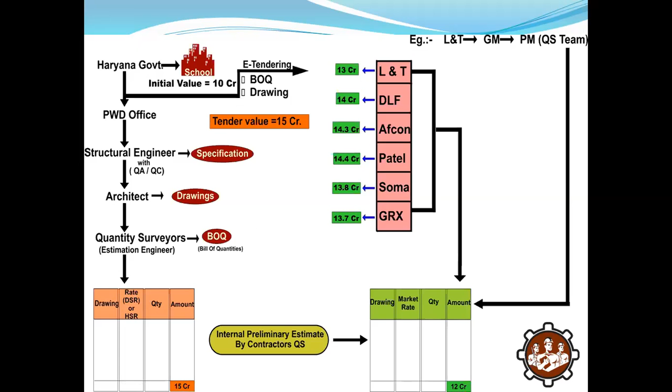Okay, so the contract has been awarded to L&T. Now this 13 crore is called the project value. L&T is ready to execute this whole project at the cost of 13 crore. This is called the project value. Now you will be easily able to identify what is the difference between the tender value and project value.

Contractor quantity surveyors prepare the bill of the works which has been executed. The quantity surveyor will have to also make the bill preparation as well. So here one question comes in my mind: what is the difference between the quantity surveyor and billing engineer? Billing engineer has to handle only the billing part, but the QS has to also make the calculation of the quantities of each and everything.

Okay, so in the whole construction process, you have to remember that whenever we are doing the budgeting, we have to consider the 3M analysis. That is 3M: material, manpower, and machineries. Material is here, and the manpower includes labor estimation, and machinery is the equipment that we are going to use in the construction. Okay, so I hope now it's clear to all of you what is the role of quantity surveyor before the construction.

The whole process that I have explained so far is being done before the construction process. So what is the role of quantity surveyors? He has to make the detailed BOQ before the tendering process if he is working on the client side or government side. And at the time of bidding, if he is working in any company that has shown interest to go for this project, he will do the preliminary estimate as per the current market rate. This whole process is done before the execution of the project or starting of the construction.

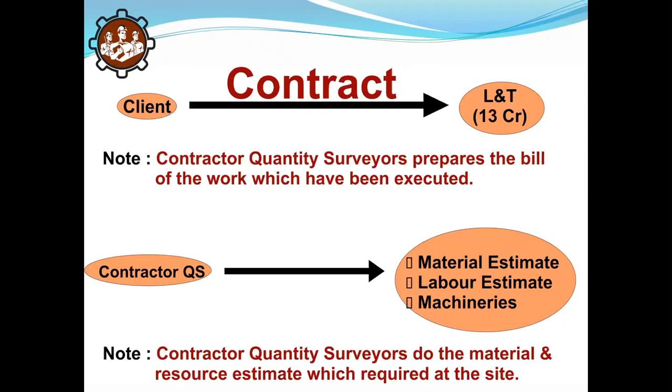What is the role? Let me explain. Suppose this project has been awarded to L&T. The amount of the project value is now 13 crore. Now the quantity surveyors working in L&T will do the analysis of this part, and as per the work order they will make the detailed estimation of the work order, so that once the project has been awarded, they will get the whole details of this project to do the analysis, and make the requirement of material, manpower and machineries accordingly.

Then this data is considered by the planning engineer to plan the project and to do the tracking of the project as well. And after the construction, it will include the valuation, and if there is any sort of discrepancy in the project, that is also being solved by the planning department and managing department.

Okay, this is now clear to you that quantity surveying is a profession in the construction industry where the learned professionals contribute in calculating. What are they calculating? They will give the cost analysis of the project, quantity required for the project, how much sand, cement, aggregate will be needed, and this also includes budgeting, bill of quantities (BOQ), bill preparations and bill certifications. This whole process is calculated by the quantity surveyor, who plays an important role in the budgeting and controlling of any project.

These are the things that are always involved, and a quantity surveyor always has to consider them. So the cost is not only related to material, manpower, machineries. There is also the site preparation cost, construction cost, labor, material, and professional fees, taxes. And one thing I would like to add is that the salary of the professionals involved in the project is also associated with the construction cost of that project.

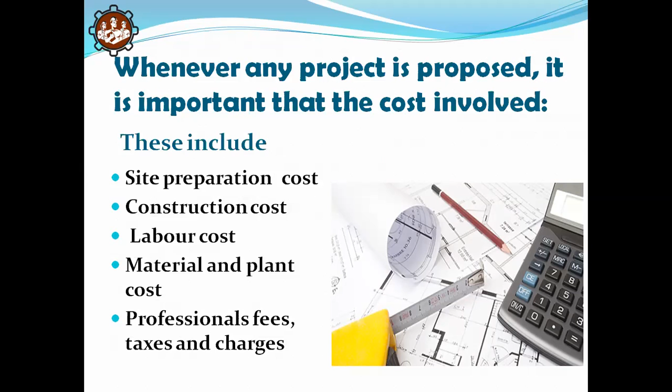Okay, so I hope it's clear till now. Now let's proceed furthermore. Here's the importance of quantity surveying.

The importance of quantity surveying in construction works is one of the most calculated aspects related to quantity, time and cost. Without it, it's hard to survive in the construction industry. The importance of quantity surveying is very vital from the starting of the project till the completion of the project.

So, to understand the importance of a quantity surveyor in the project, suppose a company is going to construct a project. They don't have any idea about the amount of material required for execution. So there might be a loss of money, and a quantity surveyor plays a good role in doing budget controlling to avoid unnecessary materials.

Suppose if we are going to construct a building that will require only 50 to 60 tons of reinforcement, that has to be calculated before the execution of the project. If we are not doing this analysis, we might go for 80 to 100 tons, and the rest becomes wastage, which won't help us do the budget controlling of the project.

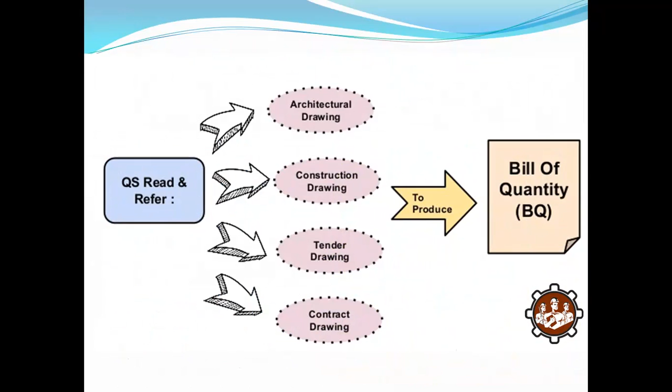Okay, now these are the requirements. If you wish to build your career in this field, you have to be very fluent with these things. You should be able to read every architect drawing, construction drawing, tender drawing and contract drawing. Once you are very fluent with these, then and only then will you be able to make a bill of quantities.

Now, I don't think I need to explain it once again - who can be the QS, where the QS works, what is quantity surveying, and how quantity surveying takes place. I hope all these questions are being answered in this presentation.

Who can be the QS? Someone having professional expertise and proficiency with all kinds of drawings, able to read all types of structural and architectural drawings. A civil engineer can be the quantity surveyor.

Now where does the quantity surveyor play a role? That has already been discussed in the previous slide - before the starting of the project, he plays a role in making the budgeting of that project, giving the company a chance to decide whether they will go for this project or not.

And what is quantity surveying? Quantity surveying has already been explained - it's the budgeting and controlling of any project. How it's being done, I will show you some professional examples in this video, so please bear with me. I hope this video will definitely help you understand the importance of quantity surveying.

If you see the quantity surveying field, there are a lot of vacancies in the current trend in different Gulf countries. There are many vacancies for quantity surveying, but they need a professional who is well trained, who is already aware of all these things, to do the quantity surveying job.

So let's proceed further. This is the scope of quantity surveying. I've mentioned some simple data here to give you a clue. There are some units that we need to consider. This data should be on the fingertips of any quantity surveyor, so he can easily and quickly calculate the quantities.

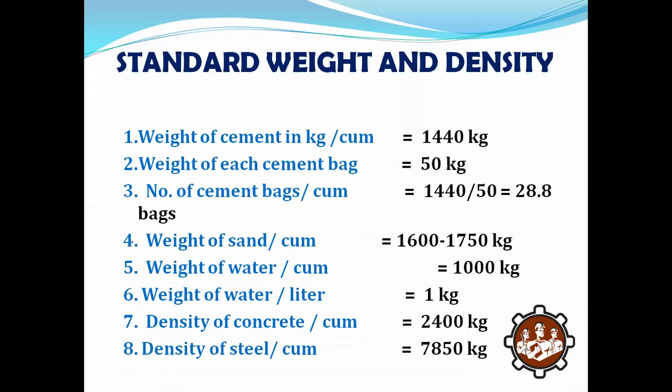With all these skills in place, a quantity surveyor is in a strong position to take a leading managerial role throughout the development of the project and run the construction company. Quantity surveyor is a professional job, you will be working in the office, you do not need to rush to the site all the time. You'll be doing your job in the office, with hardly a few site visits needed. But one thing you need to deal with is the structural and architectural drawings.

So this was all about how to do the quantity surveying part, what is the importance of quantity surveying, and what is the requirement to build your professional career as a quantity surveyor. I hope this is clear to each and every one of you.

Now I will be discussing how you had to read the drawings, from where you can initiate your work to do the quantity surveying job. Just bear with me, please. I'll be sharing a few more structural drawings.

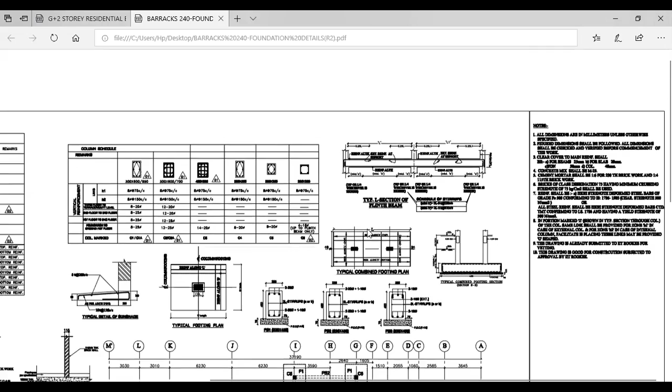This is an important thing for you people. You can see it is a structural drawing of a foundation. There are different aspects, I will not be explaining it in detail, but I'm showing it only to give you an idea about quantity surveying, how a quantity surveyor works, how he deals with the drawings.

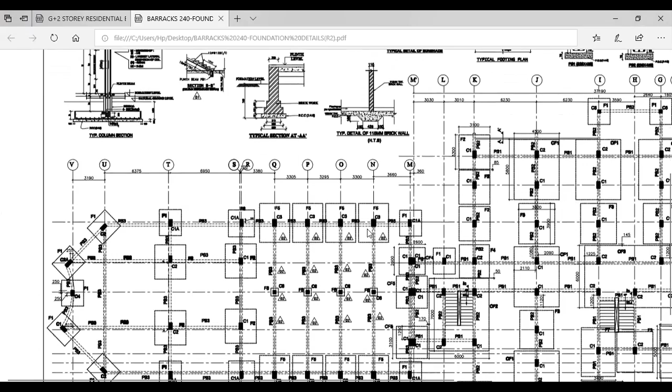Suppose this structure has been built by the structural engineer, and everything has been done so far. Now we are planning to execute this project. We don't know how much cement, sand, aggregate, and labor cost is going to be included in this project. Now it's the job of the quantity surveyor to do that part.

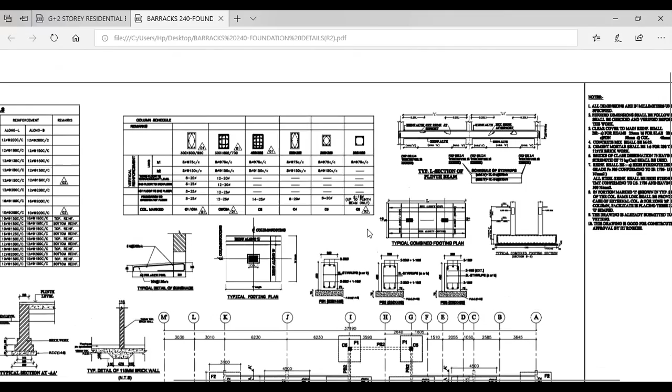The first thing the quantity surveyor will do is the quantity takeoff. First, he will do the quantity takeoff and calculate the number of footings that are going to be constructed in this particular structure. He will be calculating these footings, how many footings are there.

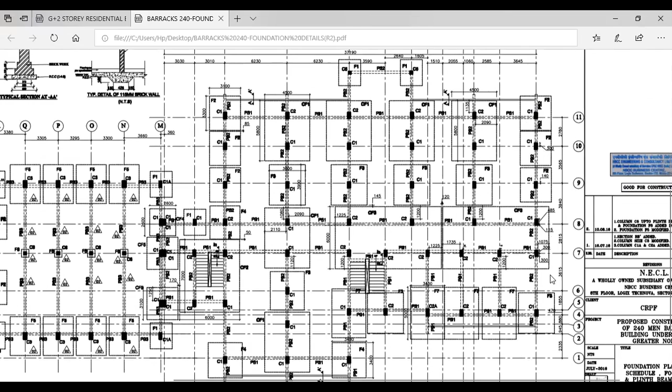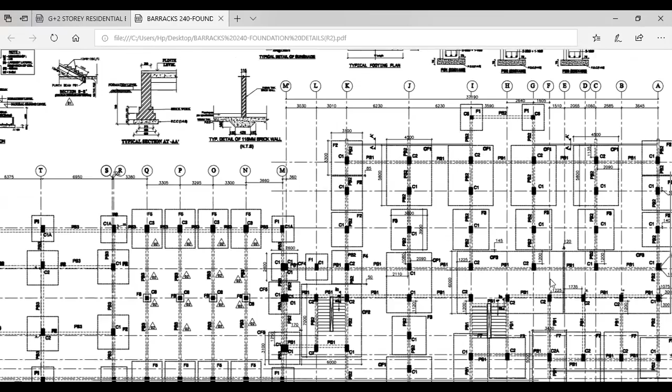And he'll do the tally part as well, to cross check whether the number of footings being recorded matches the actual number or not. Once he does the tally, he will take the data and dimensions of each and every footing used in this structure from this chart.

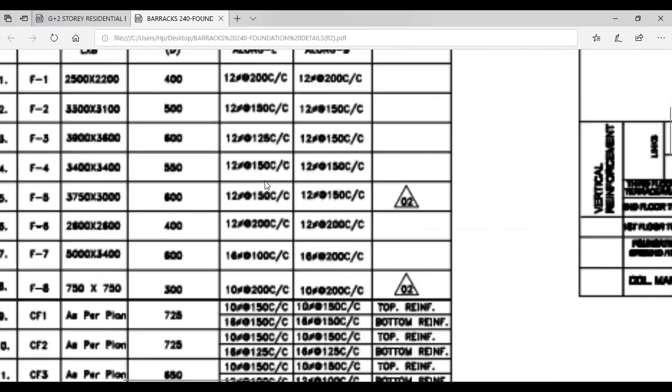Suppose you can see it, I will zoom it in. In this whole structure, the footings used are F1, F2, F3, F4, F5, F6, F7, F8, and CF1, CF2, and so on accordingly.

So the quantity surveyor has calculated the number of footings to be constructed in this project. Now he will take the dimensions from here, this is called the schedule of footing details. He will take the dimensions of each and every individual footing and consider this data for calculating the quantities.

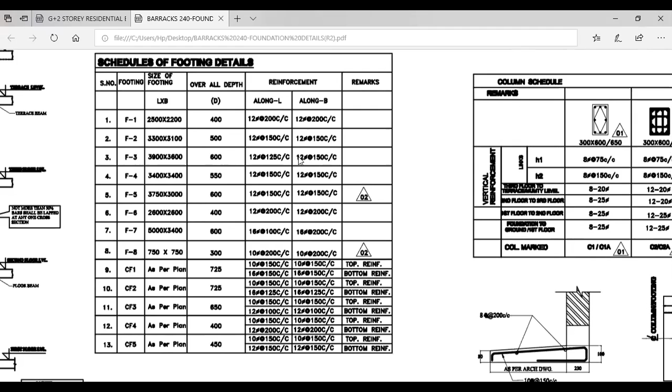And this data is used for calculating the BBS, what is BBS? It's bar bending schedule. It's one of the most important, interesting, and challenging topics for any quantity surveyor, because every drawing comes with a new challenge in front of us. Every drawing has some different specifications. We need to understand each and every aspect to calculate the most probable and exact amount of reinforcement in the execution.

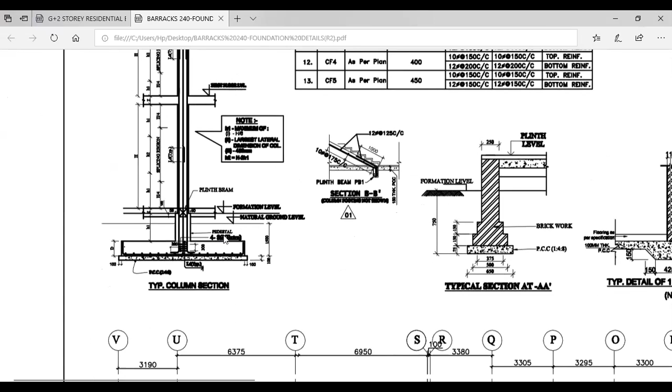My intention in showing this drawing was only this, that most civil engineers who are freshers are mostly unaware of these kinds of drawings, how to read them, how to check the detailing process, the reinforcement detailing in the footings or any other RCC member. So I hope it is clear now that the quantity surveyor will be considering the data provided in the drawing.

Now, what is the next step in the professional work of any quantity surveyor? So once he calculates the number of footings here...